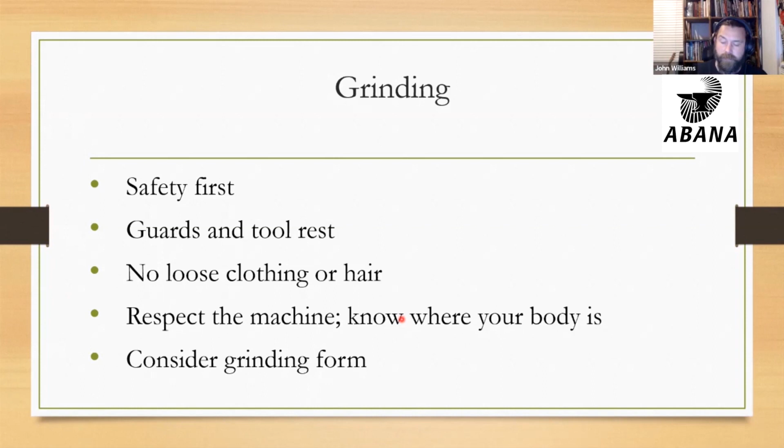So just be careful when you start incorporating tooling into your shop. This could be power hammers or anything. Learn the safety protocols for those things and be careful.

So for grinding positions, my grinding videos in here are pretty brief, but I don't have the guards and the rest on because the pictures and everything have a bit more clarity - there's less going on in the video. But with this tool, you want to get an angle onto the business end to where you're going to get a slope.

I like to grind in an up position because then I can see if my business end is square - am I putting 90-degree corners on there, or am I starting to go sort of rhombus, just like with forging? I can also see the size, so I can see if I'm going to grind too far.

I should mention that this is the same tool essentially as the one that Victoria just demonstrated. The business end is the same size and same radius, so it matches up to the other tool. And to get that, you're going to add an extra 1/8 of an inch of thickness. So where hers was to an end that was 5/16 by 3/4, this is 7/16 by 3/4.

Okay, now I just usually square up the ends. I'm going to get my bevel on here. When I'm satisfied with that, I'll take my corners off, just like I'm making a round end. So you take the corners off, then the corners off of the corners, and then you round everything up.

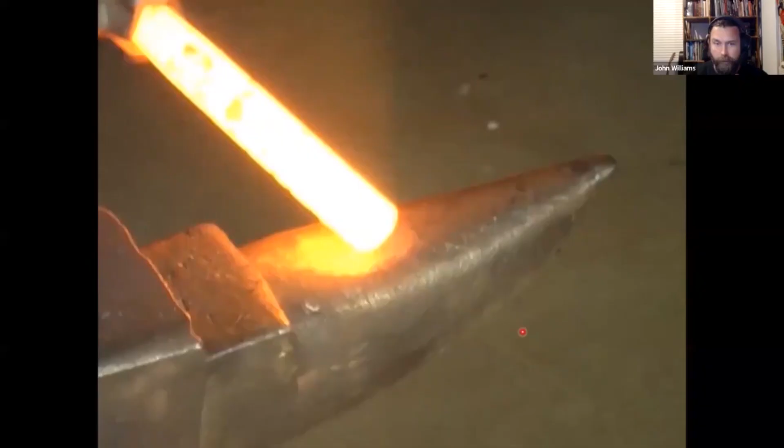For this one, you're going to do a quarter inch taper at the end, just a square taper. Then after you've forged that square, you'll file or grind to about 85 degrees, blacksmith 85 degrees. Okay, so we'll just do a quick tapering video here.

You're going to use the round side of the hammer, turning 90 degrees between hammer blows. You'll notice I rolled it 180 degrees at one point to do even forging. Then after you use the round side with the horn, you're going to come to the face and clean up all the edges and chamfer your corners.

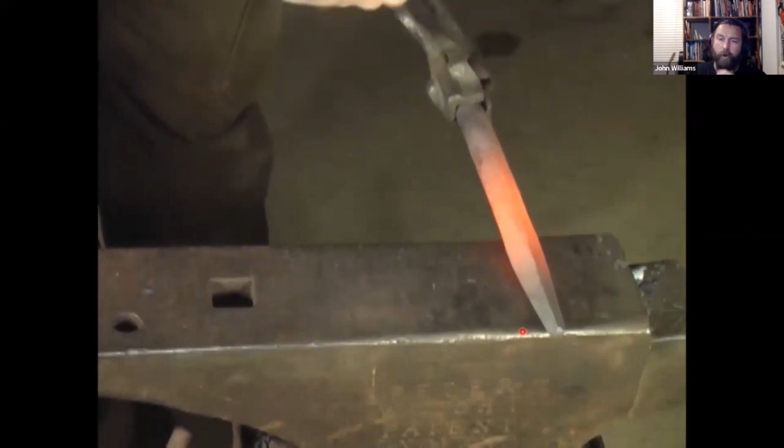Again, notice that I'm working with some heat. Now it looks like it's getting a little cold here. In my shop, Victoria and I had some really bright LED lights to pick all this stuff up. So all my videos look like the color range of my stock is actually darker than it really is in actual fact. So bear that in mind.

If you were in a shop that didn't have a lot of hot glare coming off of bright lights, and you were getting into those ranges, then I wouldn't be forging those low. But in my shop, it actually appears to me a little bit brighter in color.

And then this one is super easy. You're just tilting to about an 85 degree angle, try to keep everything square, and press in until you've got the angle established. This tool here, you want to just take the sharp off of it because you don't want it to cut. You want it to be pushing around.

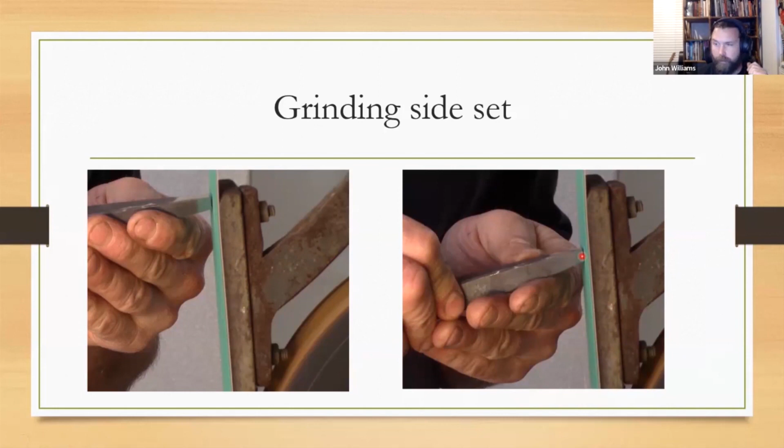So after you've done that, then you can use a file and maybe a little bit of sandpaper to clean that up. Now we're getting into detail punches. These are all the ones that are going to have round tapers.

We have an ear punch, which is going to be 3/8 of an inch at the end, 3/8 of an inch around. You have this bob punch, or you might know this as a ball fuller, that's a 1/4 of an inch around at the end. And then you have this one, the eye punch. You have to make this bob punch to make the eye punch.

This is 5/16 because you have to have a good footing for this punch to fit into. Then you'll grind or file down. This one here will be 3/8 of an inch at the end, and then this edge here will be 3/8 of an inch long. So this finished diameter here is about half. But what I'm looking for is after starting at 3/8 of an inch diameter around, I have this 3/8 inch long edge on the business end.

So you're going to do square, octagon, round. Use good forging principles.

It's especially important when you're using tool steel to use good forging principles, because the types of stresses that you'll get in mild steel will be amplified when you use tool steels because of the addition of the other elements in steel. So you'll show any flaws in your forging when you do it with tool steel.

So this will be for the ear punch. It's kind of like a center punch. And we're going to take this from square to octagon to round. I'm going to take the corners off of the corners. And then after that, I'll take another heat, and then I'm going to roll this.

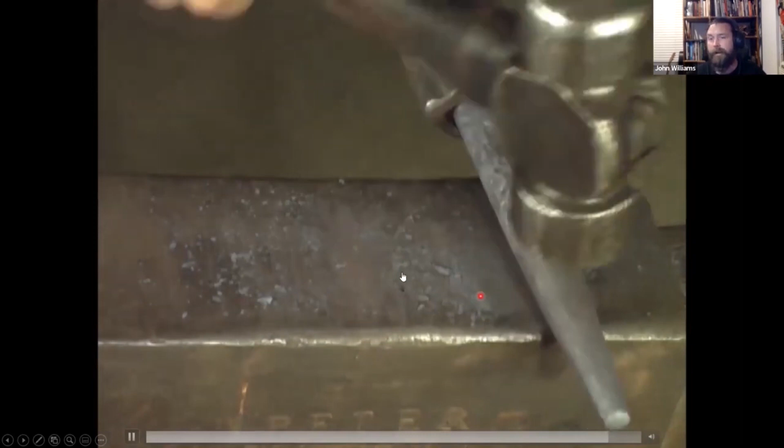Now you could work on just rounding the end. On my tools, I like to work up into the stock, but you'll notice that marks are an octagon. A lot of that's just really aesthetic preference. So make this tool your own. What matters is that you have 3/8 of an inch round at the end.

So this is basically a recap, but this is good to see where this is used. This is going to punch into the ear. And I would say, maybe this is like a 45 degree angle-ish.

So with the ear punch, again, I see a lot of people, they'll grind their center punch points off to the side, perpendicular to the platen rather than up and down. But again, I like to see when my point is meeting in the middle, which I can see when it's above and in my view.

And I like to start with a short taper, and then just like with a taper when you're forging, you do a short taper and then you extend that back. So I did a little bit of a short taper, and then I continued to grind, turning as I went until I got my 3/8 of an inch.

The bob punch, and this is where I was saying it kind of matches up to the sort of ball end corner on the fuller. You can see it can be used in there to define the eye where it meets the ridge of the nose. You're going to take that to a 1/4 of an inch round and file the end so that it has no sharp edges, essentially a ball.

And this is a real good tool to use that shoe shine deal that Victoria showed you. So we're going to be squaring the end up a little bit. Now my hands are out of position because I was trying not to work around. So you'll see right here, I'm a little awkward how I'm filing because I'm trying to file backwards and stay out of the view of the camera.

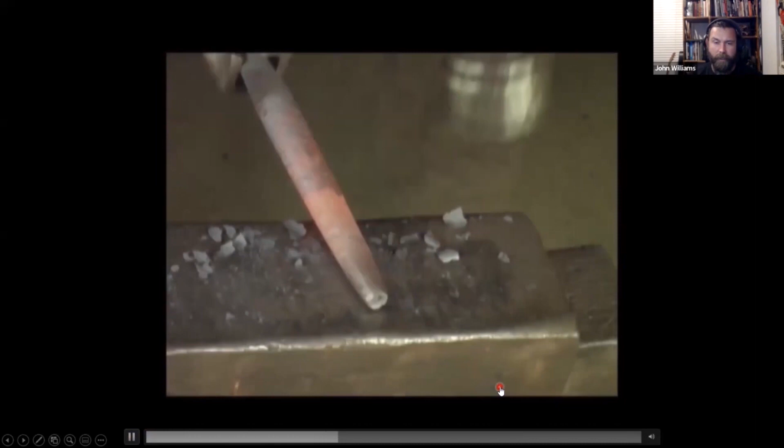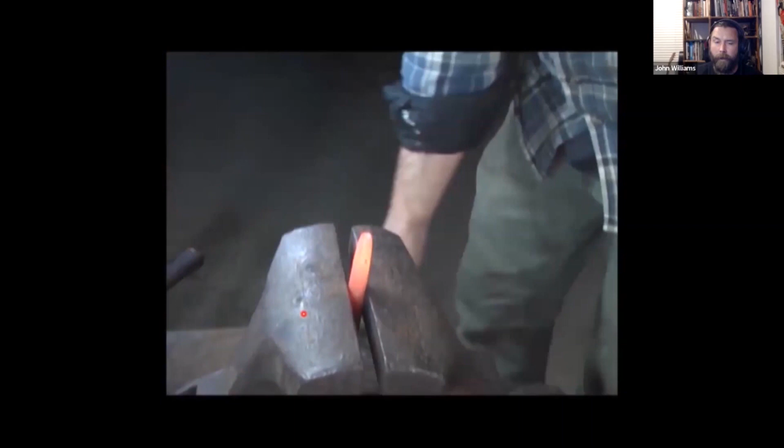Once I've gotten that cupping where I want it, then I'll do this. I'll clean this end up to the 5/16, and I'm continuing to turn it because I want to emphasize that cup.

Now I'm going to take the bob punch that we just made. The bottom end's resting on the box of my vise. And now I'm going to turn it so that I equalize any irregularities, and then I'm going to steer it and aim it at any areas of this punch that I want to try to target. So this got a little out of whack, and then I had to do a little bit of straightening before I did filing.

Now, you can do these two different ways. On my tools, I like to have a little bit of a sharp edge on the rim, which helps you get a little bit of a bite, but that adds kind of a hard look to your forging. So looking at Mark's, this is a little bit more rounded on the edge, and I think that's gonna lend a little bit to your aesthetic preference. And again, this is gonna be your bear head.

So if you want more texture or whatever, make it the way that you want it. But basically, you're going to now file the excess off, leave a little rim. You can soften that up and round that up and leave the rim, or like I did, I put a little bevel on mine, and that helps it bite just a little bit.

For mine, sometimes I have to push my eye up from a mass and then kind of move it around, and it really helps if you can grab on by getting a little bit of a bite, but then you'll get some sharper edges too, sharper lines on there.

Okay, so I'm just going to clean up the end a little bit where I had some excess thickness, and then I'm going to file until I've gotten that little rim. So it does have a little bit of a flat spot left. Then I'm going to turn it, and I'm going to keep on filing all the way around until I've gotten the thickness that I've decided I want for that to be proportionate to the work that you're going to do. And that is, just a fair amount of filing.

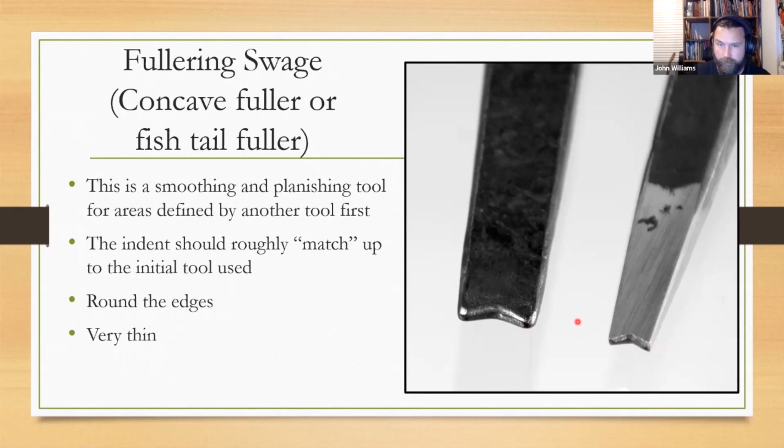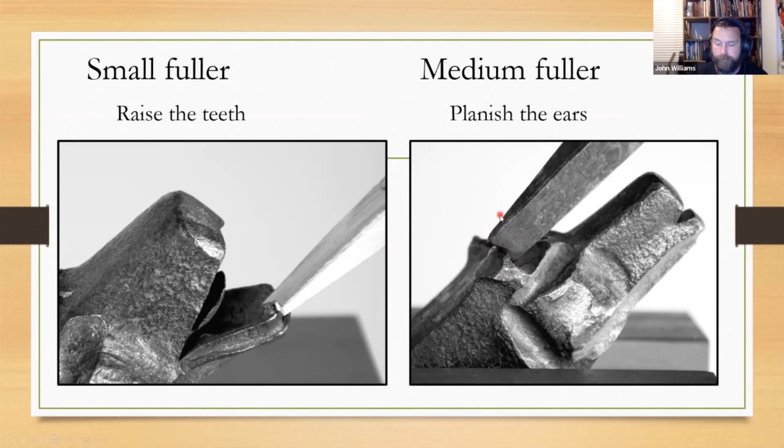The little one is for pushing up on the teeth, these canines here. This one's for fullering the ear from the inside of the ear after you've used your ear punch. So this end right here actually matches that little bit right there, matches the profile of the end of your ear punch. So that's what I mean by saying make them match each other.

You're going to start with a narrow fuller or just a flat taper. And you're going to remove material by making a square taper. In other words, you're going to forge the end so that it's a smaller cross section, because steel forges best when it's compact and it has a good relationship, like say a 1-to-1 ratio between its width and thickness would be the same size.

And then by the time you get above 3-to-1, if you were to hit these thin edges, you might cause this edge in here to buckle. And that's more important on tool steel too, because if you have buckling in here, you can actually propagate some cracks by forging on real narrow edges. So you want to keep things square until you take it to a flat.

So here's this larger fullering swage, and I'm going to work both sides. I started out maybe 5/16 on the end or something like that, 5/16-ish square on the end.

And then by the time I flattened it out, it was the called for 1/8 inch. And then you got a smaller tool, you do a smaller square. So this one was maybe 3/16 of an inch on the end.

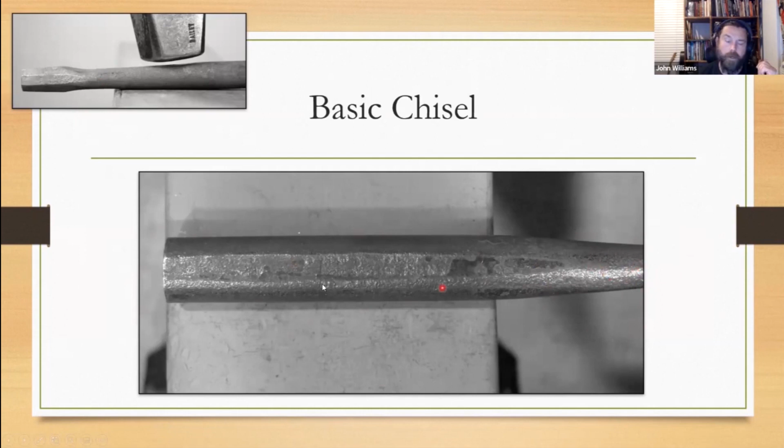I actually have this turned the wrong way, but you're going to have it parallel with the indexing. Works best. So you're going to angle slightly. You're going to forge both sides evenly.

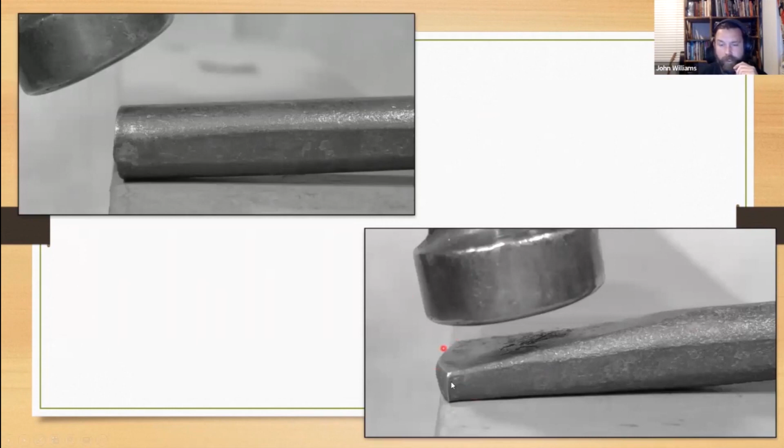You can see the end is a little bit curved here. That's what we're going to remove with a hot cut. You're going to continue to work your flat plane back until it terminates at the same spot that your indexing terminates. You're going to go square to the center axis of the tool and trim with a hot cut, just to make things faster.

And then if you want to visually reference whether or not you've got a good even forging, this line here is going to tell you whether or not you forged this evenly. For instance, if you had a big hollowed concave section in there, that would be an area that you haven't hit enough, and as you hit it, it will fill out. If you have a bulged area, that's an area that you've hit more, and you want to avoid that until you've worked the adjacent areas.

Once you've done that, you want to make sure that you're maintaining this same geometry. So don't elevate your hand when you're working the edges. You want to make sure that the stock is always flat on the face of the anvil. Here's another example of what I was saying. You want to terminate your bevel up where the termination of the indexing is, so you'll have this sort of peaked belly in here.

Then you're going to, when you hot cut, anytime you hot cut, you never want to cut all the way through. These things go ballistic really quickly and they fly to unpredictable areas. So that's my biggest concern. Secondary concern is I don't want to damage my tools.

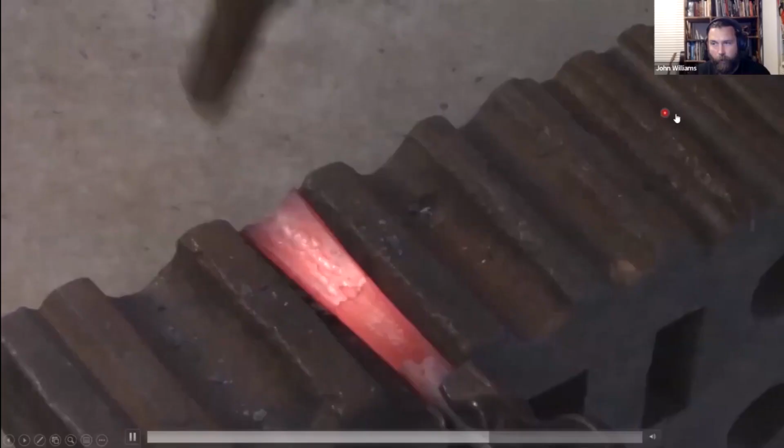Now we've gone over to a swage block with a 1.5 inch round. You could have a hardy tool for this. I'm using my leafing hammer because it allowed me to work where I wasn't going to interfere with my knuckles over here. You can see my knuckles are, you know. That leafing hammer worked out really nicely because it has a long peen and it allowed me to get in here. But I usually will use my cross peen in a swage in my hardy. I just have one, and if you do the curriculum, then you're likely to have a leafing hammer too, so that's cool.

Okay, so then you're going to take that and then you're going to file. This side is going to be your flat edge, and the back is going to be a bevel. This is a second tool that I used for this filing video, and it's thicker than I would make, but just bear that in mind when you watch the video, that you would want to forge thinner than this.

Okay, so I've got a bevel started here on the back, but I'm going to take this bit out here is what I want to show you, because that is going to create a lot of resistance on the cut, and you want this to be able to cut back pretty far. So I'm going to take all of that out to where it's not going to do a lot of upsetting and act like a big wedge either.

So this is where it's used. It's used for the mouth with the curve down. You're going to file your edges, then you're going to heat treat all of these, exception of the one that we'll be getting to shortly. They're all 4140 and will be heat treated the way Victoria described.

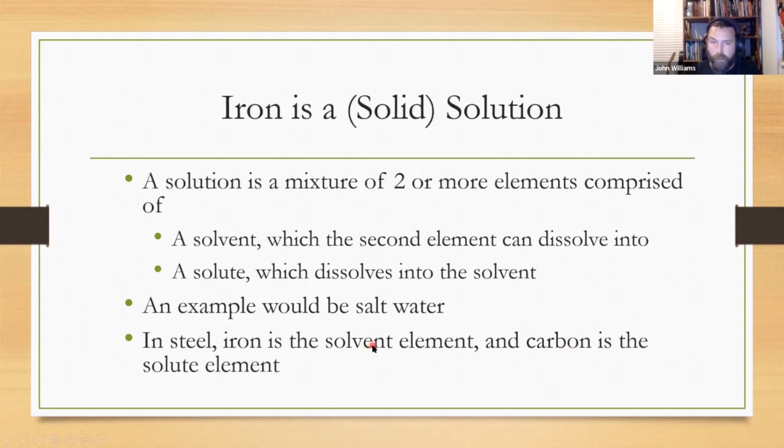Why does steel harden? Steel hardens because, as Victoria mentioned earlier, in a normal state - let's back up to what you'd call the baseline state with steel - if you just let it cool gradually, it's going to form what's called pearlite, and that's soft. That's what's happening when you normalize something. When you anneal something, you bring it up to temperature, let it cool down slowly, and it's soft and stress-free.

It has carbon in there, but it's not distributed really evenly. Mostly you have the ferrite, that's the soft stuff, and then you've got this other stuff called cementite, and mostly carbon's tied up in that cementite.

So the structure of iron is this cubic lattice. You probably saw that on the chart that Victoria put up, and there's these couple of little cubes on there - they look like a six-sided playing die, like you play dice with. That's how carbon molecules arrange themselves - they arrange themselves on the lattice. And when I say molecules, I mean the atoms themselves, so the atoms of carbon.

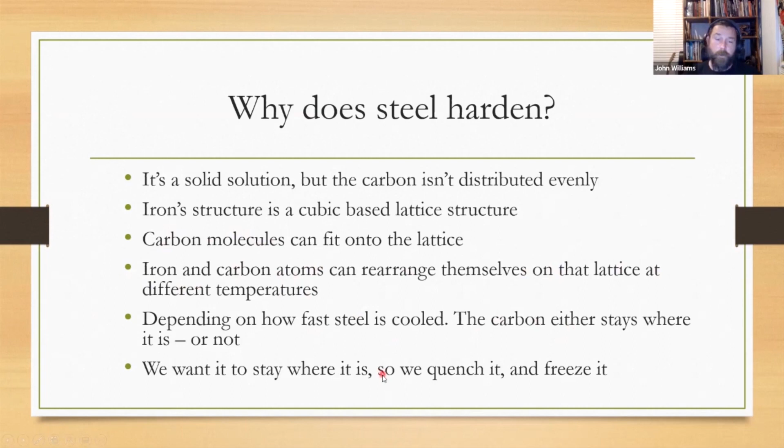Iron and carbon can rearrange themselves on this lattice. So as it goes up into critical temperature, that lattice changes a little bit, and then depending on how fast you cool it, the carbon is either going to stay on that lattice or it's not. What we want it to do is stay on the lattice.

So I want to have a couple of visual aids so you can visualize this. If you want to know more about this - and I recommend that you do - you're not going to get everything you need to fully understand this subject in a single talk, and there's a lot of terminology and concepts you need to learn. So I found a good site called msestudent.com - that's material science and engineering student dot com - and it explains a lot of these really well.

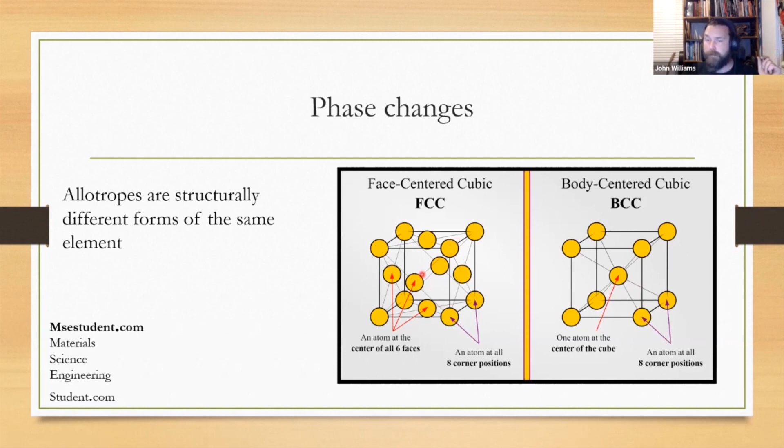But I want to point out these little cubes because this is important - this is what's going on internally when you get this up to austenite. All steel, regardless of carbon, will do this: at room temperature, or when it's cooled slowly, it has an atom in the middle. Then when you heat it up to that critical temperature or transformation range, you get thermal expansion, and all of a sudden some other iron atoms pack on. These are all iron atoms - that's not really necessarily what's important. What's important is that carbon can pack on too while those extra iron atoms are packed on. So that's called a phase change.

And at low temperatures, pearlite is formed, and the carbon is less soluble in what's called alpha iron - that's the iron that's at room temperature, or allowed to cool slowly. That's what happens when you normalize it. Anything below critical temperature, and it precipitates out and forms this thing called cementite.

I know this is getting a little bit ahead, and a lot of this is kind of like my math, right? Not everybody's a math person, but if you want to fully understand this, it helps if you at least get introduced to this a little bit.

So all the carbon is in this cementite here, and it just looks kind of like cement under a microscope. That's why they named it that.

At higher temperatures, you form austenite. The carbon becomes more soluble. It's exactly what's happening if you have a glass of water and you heat the water up, then salt will dissolve more readily into the water. You've changed the solubility of your water.

And at higher temperatures, the solubility of carbon in iron changes, and carbon can diffuse out of the cementite, and it can go into the other parts of the steel. You'll imagine that it probably takes a little bit of time for it to move from one place to another.

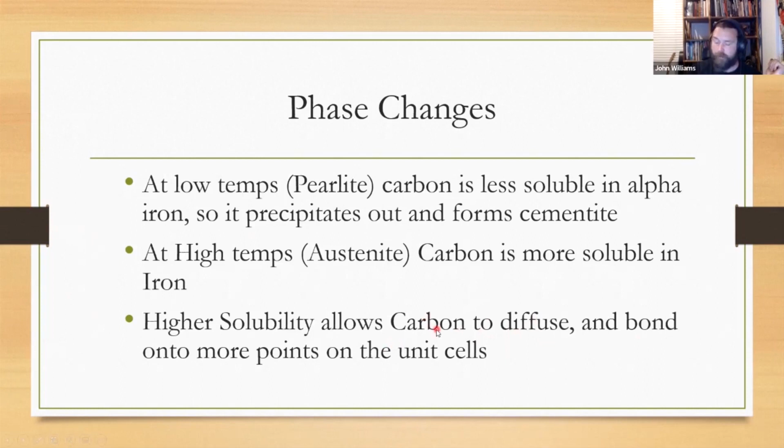And that's why you want to do your soak, because it takes a little bit of time for that carbon to diffuse. So getting back to that little cube lattice, this is your ferrite here. This is when you don't have any carbon attached at all. And these little gray guys, that's your carbon. You'll see that those are able to stick in here on these edges.

So austenite, what's important about going from this structure, this body centered, where there's one atom in the middle, to this structure here, is the spaces get a little bit bigger or more available for this carbon. There's more places, and the carbon will start attaching and forming austenite.

So it's going into solution, just like salt and water go into solution when you heat it up, or more readily. And then when you freeze it, it gets stuck. It goes back to this, but it gets stuck with these carbon guys on there.

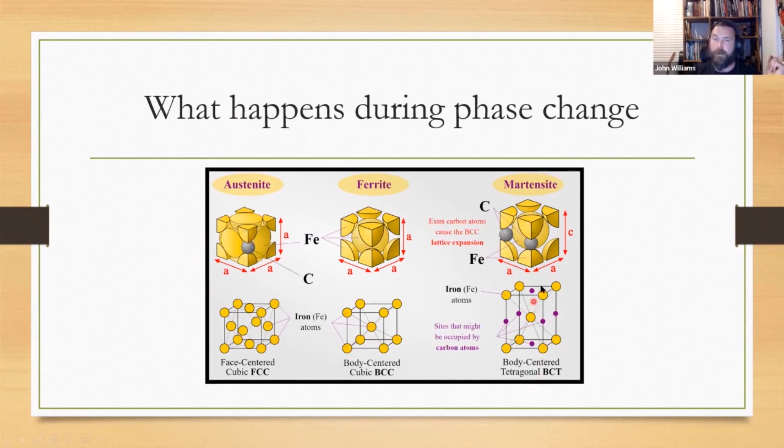So that's the whole point of what you're trying to do, is you're trying to bring it up to where you have austenite, and that's basically making these sites available for the carbon to stick. And then you freeze it by cooling it down too rapidly for that carbon to go somewhere else.

Normalizing and annealing is when you cool too slowly to make martensite. This is the hard stuff that you get from austenite. So normalizing and annealing, they do about the same thing really, but one happens over a longer period of time. This is if you insulate with like vermiculite or ash. So anyway, they're both forming pearlite.

And hardening has two components to it. You've got to heat it up to within the specific range. That's the critical temperature or transformation temperature where it makes austenite. And then there's a cooling factor to this. You need to cool that fast enough that it doesn't form this stuff, the pearlite, and you want it to make the martensite.

So tempering, what does tempering do? Tempering degrades this martensite that you made, this real hard stuff. It starts to break it down, and it actually starts turning back into pearlite. But the cool thing about being able to temper is that when you're applying heat, you're applying it in a controlled way. You can apply more heat or less.

And if you apply less heat, then you form less pearlite. And if you apply more heat, you'll form more pearlite until all the martensite will go away eventually. If you temper too much, then you take all your hardness off, and you'll know that because you know not to, say, heat up the end of a chisel when you're grinding it on the grinder, or else it'll go soft. That's because you've broken down that martensite.

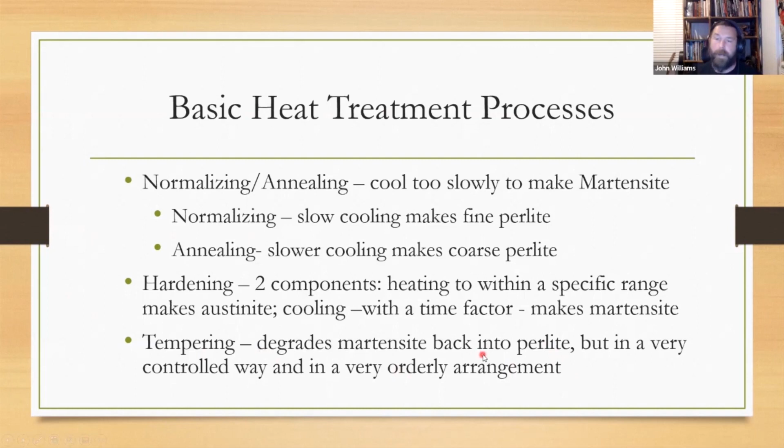This blue range here is going to be where you form perlite, and let me explain what we're looking at here. We have time on the bottom in seconds - 1, 10, 100 seconds - and this is temperature, unfortunately in Celsius. Up here would be your critical temperature, and these arced lines are what are called cooling curves.

You'll notice this blue is specifically where perlite forms, and you're coming down over time. Now this one right here, you come down over time and it misses the blue - it's ahead of the blue. If you're ahead of the blue in this area, you're going to form martensite.

These lines, on the other hand, you can see they go through that blue. So this coming down over 10 seconds would be representative of how fast water cools, okay? Right here, this is your normalizing.

You'll notice it's 10 to the second, so that's 100 seconds - that's normalizing, okay? And then over here, 10 to the 4, that's a lot of seconds. We don't need to worry about how many, but that's going to be annealing - that's if you insulate. There's a reason why I'm showing you this particular chart.

This is called a time temperature transformation chart, a TTT chart. It's actually CCT because it's got the blue outline. But the point is, you've got to miss this - it's called the nose.

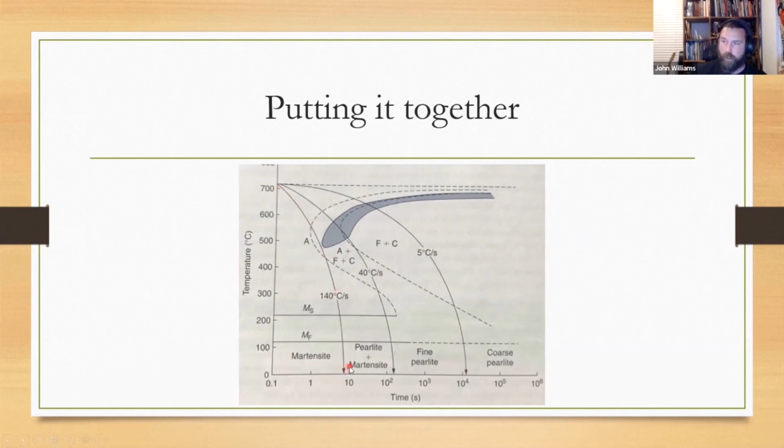So you have a bigger window here. Instead of being 10 seconds that you need to race past the nose, it might be 100 seconds, or it might be 500 seconds - who knows? It's every steel is different. So you got to get the chart, it's called a data sheet for each steel.

So imagine that you're in a room, and on the far side of the room there's a door, and you need to get through that door, but the door is closing. So you just need to get there before the door closes. A steel like water would be like a steel that the door is closing fast, so you got to run, because you got to get there in a short amount of time. So you got to run to get through that door.

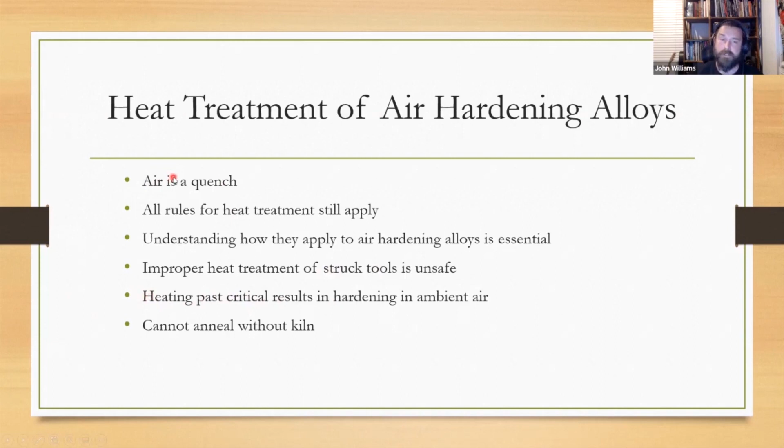And that's really important, because if you're not understanding what's going on, you could make an unsafe tool. You could still have hardness on the struck end. So what that means is, now that we've talked about what's going on, if you heat past critical temperature on an air hardening steel, and air is your quench, then you know that if you get this hot enough, it will quench. So you can't normalize or anneal this in a practical way in the shop.

And just to emphasize that, like I said, you can get a data sheet on all of these tools, on all steels. This is right from a tool steel manufacturer. Bringing this up to critical temperature, look at this range, 1800 to 1890. Well, first thing you need to notice is that's a lot higher than what was shown on that earlier chart. That's really, really hot.

You can do as low as 1800. It says air is the quench, meaning air is sufficiently rapid cooling, and this is why that chart, getting back to what Victoria said, 'sufficiently rapidly' is the wording, because there's different rates of cooling that you need for different categories. And tempering, this is another thing I want to point out, is that technically you should be tempering at 1000 to 1150 and hold for an hour per inch. Well, you're not going to do that in the oven you bake cookies in, right?

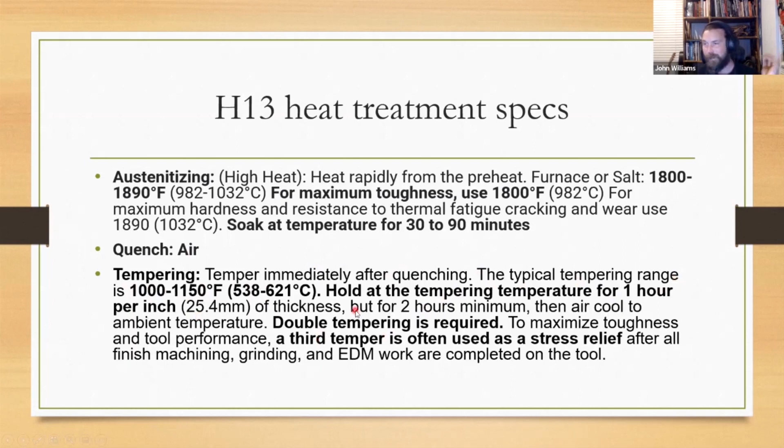Hardening H13 without a kiln. Now I have a kiln, so I can anneal this. So I have a struck end because I can do that, but you don't want to ever heat this whole area up, okay? And what are the particulars here? It's going to harden in air, and you need to heat it to 1800. So how do you know what 1800 is?

The best way that I would recommend if you're going to start working with steels like this is, as Victoria said, you want to start with your magnet and know that that's at 1420, and then learn your heat treatment range for normal steel. And you're going to start having to learn how to gauge by color, but everybody perceives color a little bit differently. So you're going to have to figure out how you see the color.

To me, I perceive the color as sort of a bright orange, but if you look at the chart, it's not really in an orange range on that chart. Or maybe it is, maybe I don't perceive color that way. So you can start to ramp it up, but you'll know it's hardening with H13 if the scale starts to pop off. So scale popping off is a good indication that you're forming martensite. And you always want to have safety glasses when working with this steel, because this stuff will fly.

But if you don't bring it up to critical temperature and it doesn't have the scale pop off, remember the color that you did, and don't take it all the way up to what you think is 1800 and just try to guess at it. Get it a little bit hotter, like a shade hotter than what you would do for normal steel, and then let it air harden. If you see that scale pop off, test it with a file, see if it's hard. And if it's not, put it back in the forge. It won't hurt it. Bring it up another shade past that.

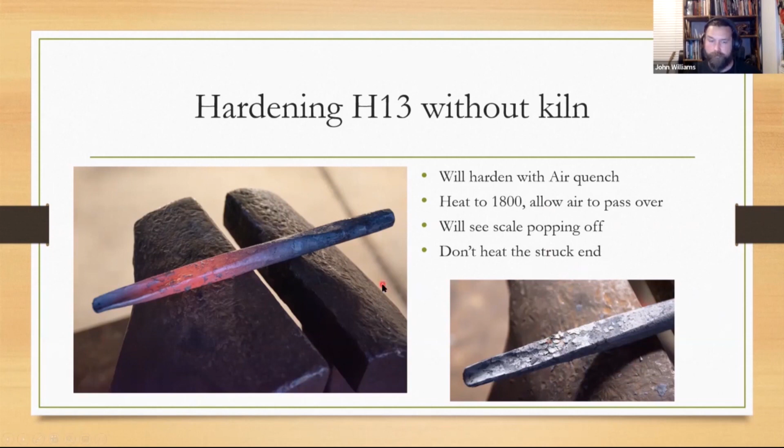And when I get the scale popping off, then I know that it's hardening. So to do this all to spec, you would need one of these guys. You need an electric heat treat kiln.

That's not to say that you can't work with H13 in a shop setting. You just need to know how some of these rules apply so you can do it in a shop setting. One thing is, you can temper in a regular oven between 450 and 475, and do that for a long period of time, 2 to 3 hours. And that's going to be your initial tempering.

And if you recall, the tempering it said was 1150 degrees, 1000 to 1150. Well, you can do either a hotter temperature or a longer time. Both will continue to break some of that martensite down into pearlite, which is going to get you your safety factor. So if you leave it longer, it gives it a longer period of time to break down a little bit and add some safety to the tool. So you do a longer period of time.

Remember, you can't normalize it, so don't get your struck end hot in the first place. However, me, just because I want to be extra safe, I'll always use a plumber's torch. And even though I don't get the struck end hot in most cases, I'll still temper because I don't know if I maybe had some heat transfer, and I just want to be extra safe.

Now, you'll remember from the tempering diagram there, it had all the examples of color. Once you get through the blue range and it just starts to go to a gunmetal color, that's 730 degrees. So if you take it up to about that temperature where the blue goes out and it goes to a gunmetal color, that's 730. And if you do that a few times, then that's approaching pretty close to 1100. And that's a pretty safe bet to make sure that you're safe.

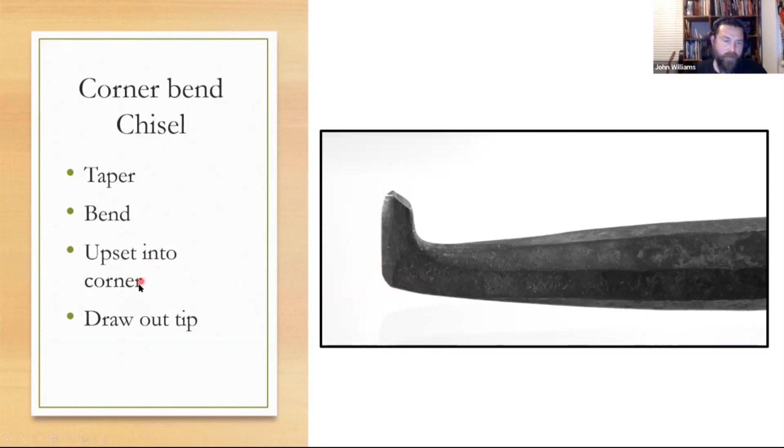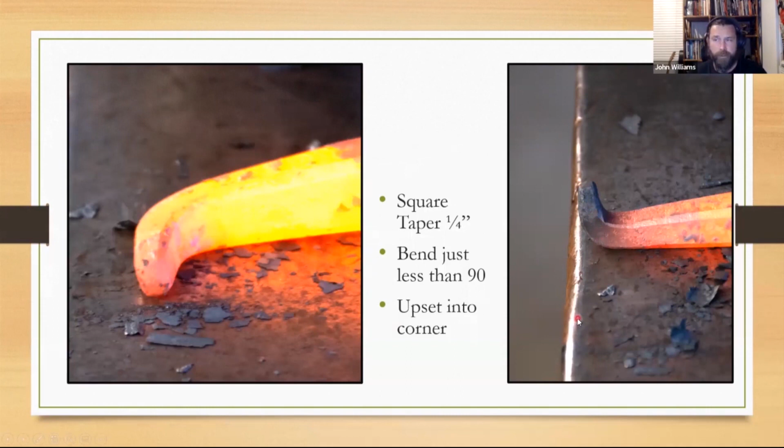So you're going to do a little tiny upset, take it to a quarter of an inch on the end, keep a little bit of an open angle from 90 if you're going to upset, or for that matter, just do a Habermann corner - it's your preference, whatever you're more comfortable with. And then clean it up and get it to 90 degrees.

And then mine ended up getting a little short, so I had to draw it out a little bit, but then you're going to take it to a little bit of an edge chisel profile. And this is for grooving the tongue, and this has to fit down into the mouth. So here we go.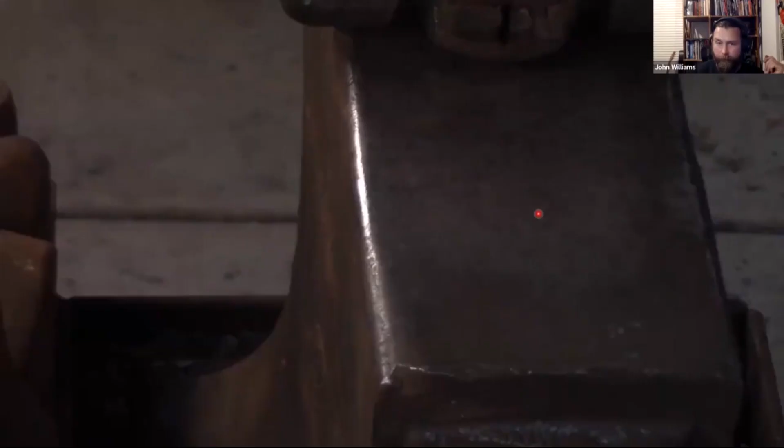I'm taking it on the off edge, bringing it just above 90, or open from 90, maybe 100 degrees, a little upset, and then cleaning up my corner. Went a little too far, but I have the means to fix that. So I use my hammer like before. Figure that out.

And from there, get up a little, then you're going to bring it down to the thickness that you need. It's a pretty thin edge. And then bevel it.

I wanted my edge to be straight, so I just clean it up. And then I ground a little bit of that back so that it can fit into the mouth, and then cleaned up my edges, and then at the end put an actual little edge on here. And that is it for me.